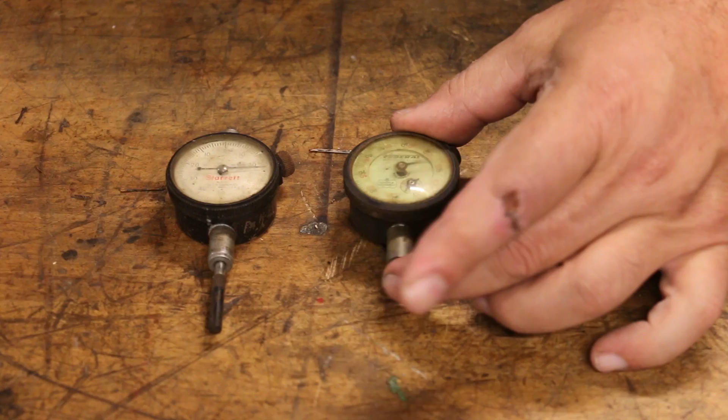I've got a couple of indicators here. All of them, I can't say they just... well, that one there may not really work. I think it's working, it's just really sticky. You know, all these are, they're, like I said, they're just sticky.

They're dirty, they're nasty. These were in a shop where I bought some machinery from one time, and they've been sitting out for no telling how long. I really think they just need a good cleaning, and there may be a few bad parts in them, but for the most part I don't think they're in terrible shape, but they're not usable as they are.

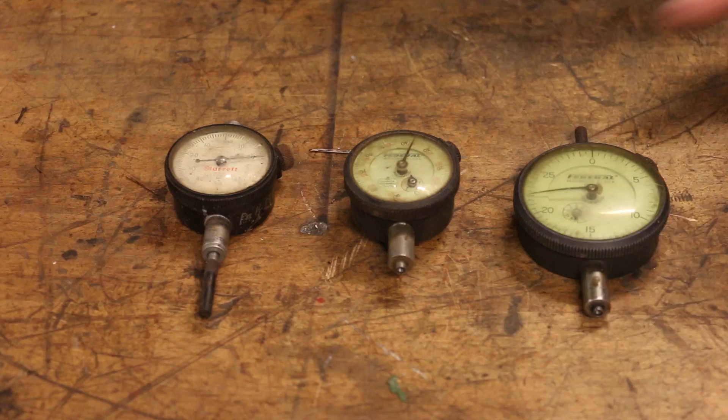So anyway, I contacted Mark, and I'm going to be sending these up to him. I wanted you guys to look at them before I sent them in.

This Federal here, it's not bad. This is a 1/1000th indicator. It's got a fairly short travel on it. It's missing the cover on the top to cover the shank. Another Federal here, this is a 1,000th indicator.

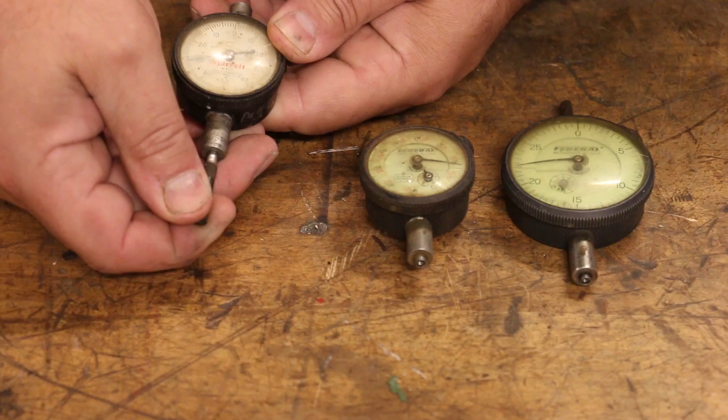Again, it's working but not great. The Starrett here, it may actually have some issues. It's working, but there's no spring return in there at all. And anyway, overall condition, not terrible, but not usable.

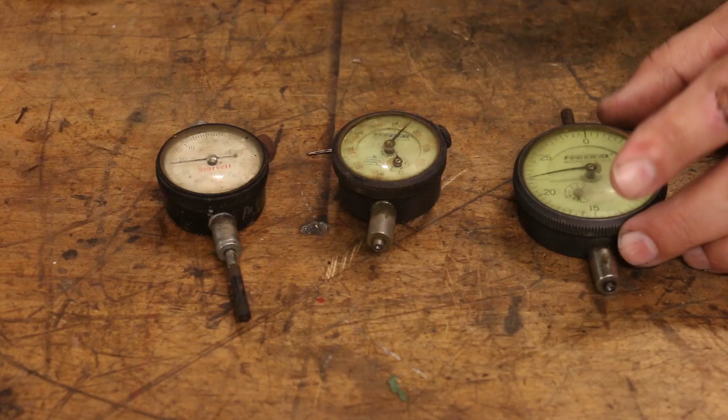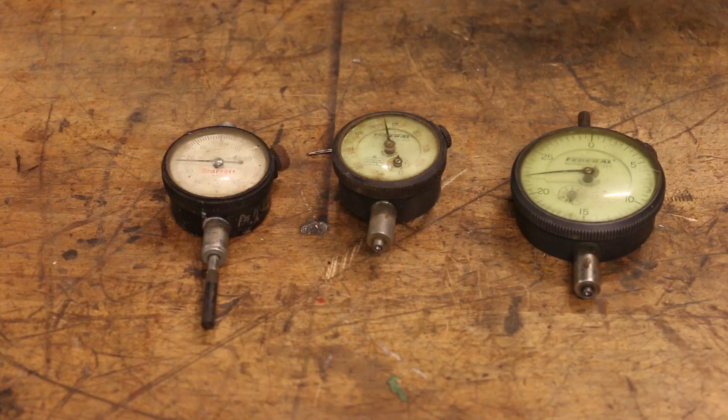So these are definitely candidates to be worked on and restored. Like I said, I wanted to let you guys take a look at them before I send them up. We'll send these up to Mark, and here in a week or two when I get them back, we'll feature them again and let you see what he did.

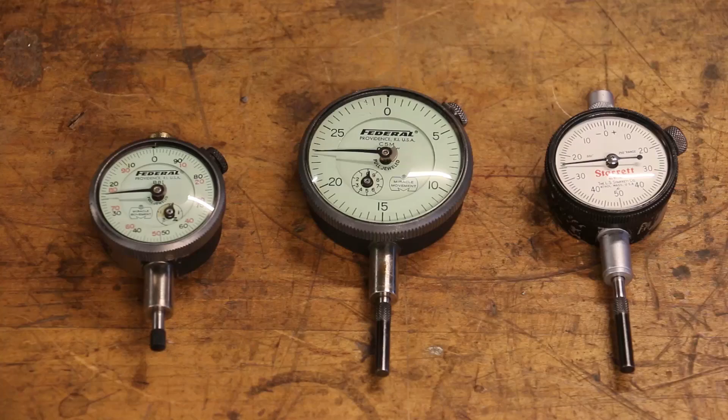So you saw what these looked like before I sent them up, and this is what came back to me in the mail. Mark had these, by the time I had time for him to get up there, probably about a week's turnaround, pretty quick. He sent me an email as soon as he got them, let me know he had them, gave me an estimate on repairing all of them, and the prices varied somewhat from one to the other. I think these ended up costing me, I almost hate to say because I don't remember exactly, $35 a piece, something like that in the ballpark.

And guys, let me just tell you, it depends on what needs to be done to it, so don't think that's a hard and fast rule. You can send them to him, Mark will give you an estimate on what it's going to cost to fix them, and then he'll fix them for you and send them back.

He tells me he has lots and lots of parts to fix all kinds of different brands. You can contact him first if you have any questions. Take a picture of whatever it is and send it to him, and he can probably give you an idea just over email. So anyway, I'm very impressed.

I was so impressed with the results that when these got back, I immediately boxed up 3 more indicators and sent them out to them, because I had a drawer with old indicators that were useless to me as they were, but I hated to throw them away because they just needed some work done. Mark's the man; he can get that done.

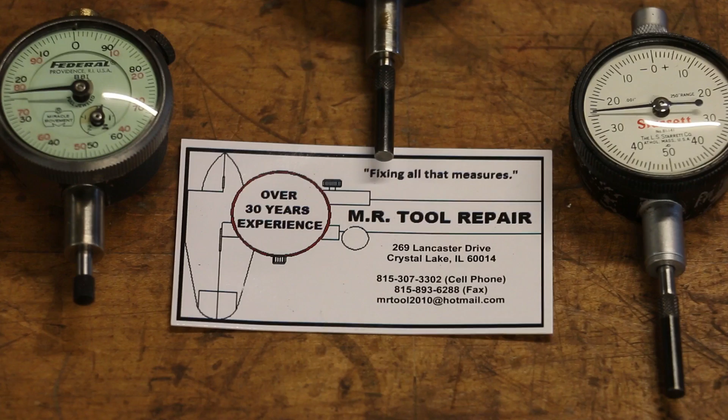So the next item here is a bunch of horizontal mill cutters that recently came in, and these came from the Bar Z Summer Bash we had about 5 or 6 weeks ago now, out in California. The story on this is that when we got out there, Tom Lipton, a fellow YouTube creator, go check out Tom's channel if you haven't already, had brought in a bunch of these horizontal mill cutters and had boxes of them there. He said, Keith, go over there, pick out some that you think you can use, take them home with you. He was basically just giving them to me.

Well, I was going to have to ship everything, and I was trying to figure out how to logistically do that, get everything packed up. I did ship a bunch of stuff back, and at the same time, James Green, yet another YouTube creator, go check out James's channel if you haven't already, was looking at them as well. He said, well, just pick out what you want and I'll take the rest back.

James and I got to talking. I said, I tell you what, James, just take them all home. James had driven out, I had flown out. I said, take them all home and just go through them and split them up however you want. Send me some, I'll be happy. Whatever I can get, I'm good with.

So James agreed, and in addition to taking them home, he went a step above and beyond. James actually took all these cutters, which when I saw them out in California looked kind of cruddy, rusty, just covered in gunk. Well, James took them back, soaked them all in Evaporust, cleaned them all up, and so far he's sent me 2 boxes of cutters in priority mail flat rate boxes, and I think I've probably still got a couple more boxes coming as he gets things cleaned up.

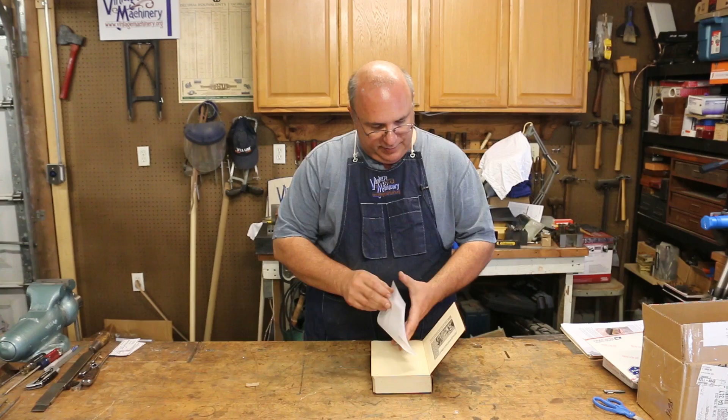Next item here is a really nice book. Came from James Massey, just came in the mail the other day. Let me zoom you in, I want to show you this, it's pretty cool. What James sent was Kent's Mechanical Engineer's Handbook.

This one is specifically on power and all kinds of power related items. Let's see, this particular one is copyrighted - the original was 1895, and the latest copyright date on here is 1915. It's got 1143 down here in the bottom, so I'm guessing this was probably actually printed about 1943. But this is basically all about all kinds of engines. This is the 11th edition, from July 1936, so probably that 43 printing date.

It's got all kinds of stuff in here about all types of power transmission or power related stuff. Let me see if I can find a decent index. Section 1 is on air, section 2 is on water, 3 is heat - boilers and so forth. Section 4 is combustion and fuels, steam, the steam boiler, the steam engine, the steam turbine, condensing and cooling equipment, refrigeration and ice making, heating, ventilation, air conditioning, internal combustion engines, gas producers, transportation, electrical power, power test codes, and mathematical tables.

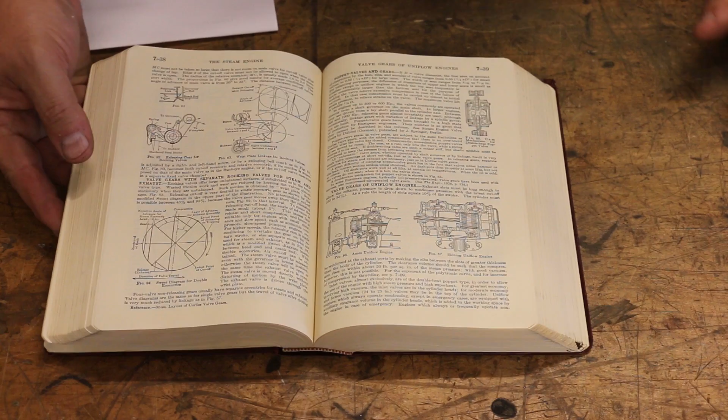So again, some pretty cool stuff in here. Of particular interest to me is some of the stuff related to steam engines - just more technical information. When you go to start working on these old steam engines, having reference books like this is really, really nice, but there's a lot more in here. Steam turbines, and up here in the front I noticed there was some water powered stuff, which is kind of cool. So anyway, pretty cool book.

I want to thank James for sending that on to me. This will be a nice addition to the library. I'm old-fashioned, I like old-fashioned books. The internet's great to look things up, but sometimes I just want to go pull a book off the shelf and look stuff up. A lot of the information in these old books, quite honestly, you can't find a lot of it on the internet anymore. So James, thanks a lot, appreciate it very much.

Next comes another little book item here. This is a really nice original copy of a manual from LeBlond. Of course, I'm restoring a LeBlond lathe right now - I'm running a Regal, and a Regal was a line of lathes that they sold. This is the 15th edition, copyrighted in 1951. Price was originally $1. This one was bought out of the University of Minnesota bookstore - we put a note on here. Notice the price tag, somebody paid 65 cents for this book.

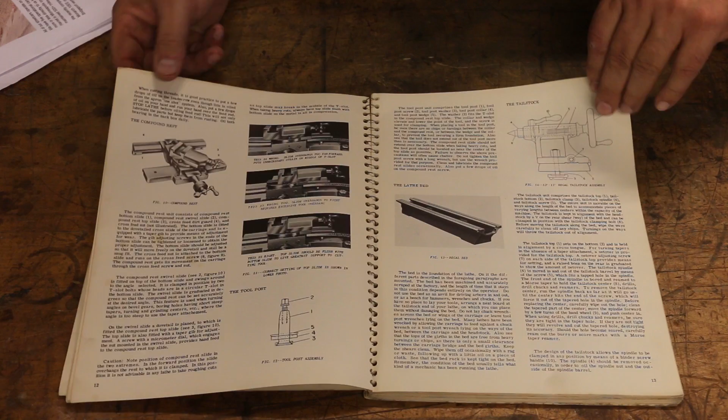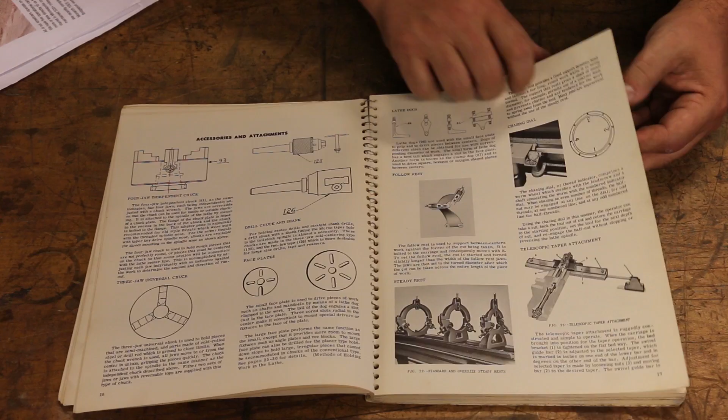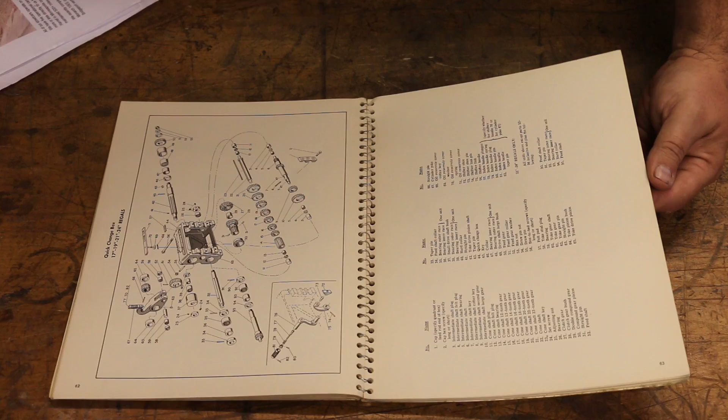So probably about 1951. Lots of information in here, really all about lathes in general. I'm going to get this scanned and put up on the website, VintageMachinery.org, with a lot of the other manuals and stuff. If we don't already have it, it may already be up there. If it isn't, I will get this scanned and put up there. But a lot of real good information. So I'm excited to have this. This will be a nice addition to my LeBlond lathe, and it'll be a nice bit of information for someone else that may have one. It even has parts diagrams back here in the back.

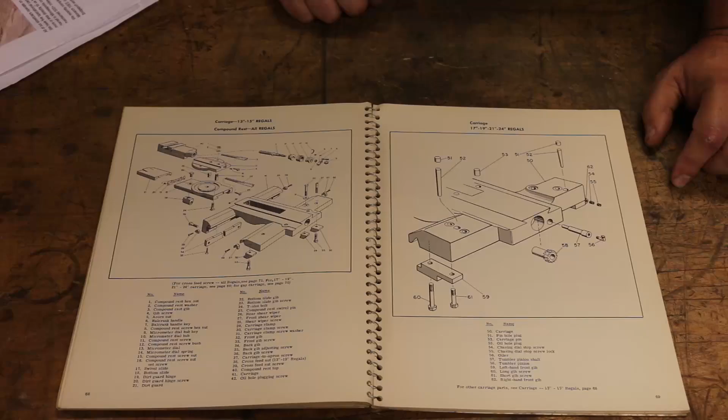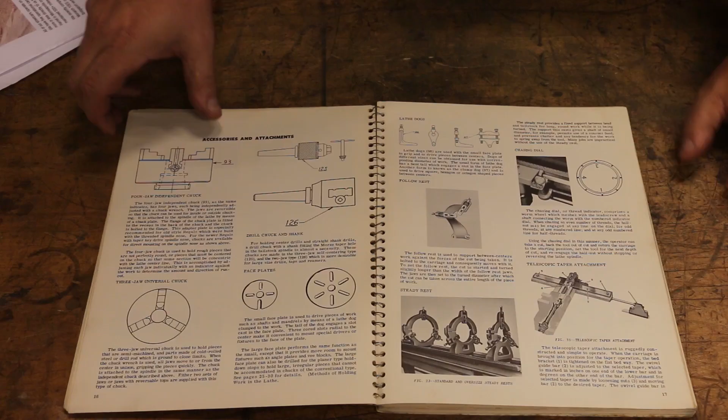And again, this is for the Regal line. Now my lathe is actually what they call their heavy duty lathe, and it is very similar to the Regals, but there are some subtle differences. So the parts diagrams won't apply to my lathe, but really most of the information in here will be very helpful to my particular lathe. But anyway, very nice thing.

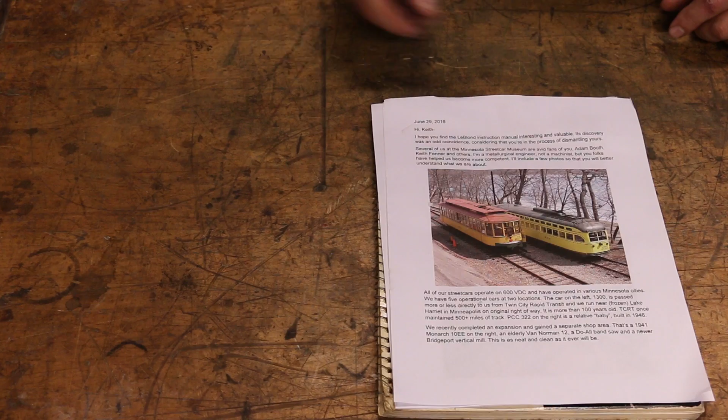Dennis sent me some information. He is a volunteer at the Minnesota Streetcar Museum, and they do a lot of restoration work up there. He sent me a nice little letter here, some pictures of their shop, working on some stuff, and so on. So anyway, pretty interesting place. I'd love to get up there and visit them sometime.

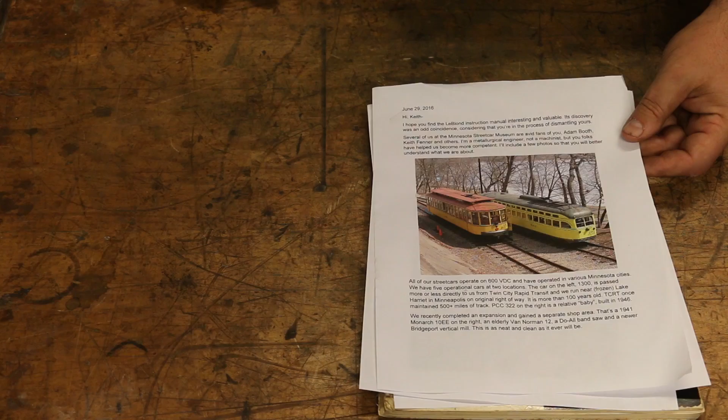Thanks a lot. Seems like we've got a bunch of paper items in this edition, which is great because I love the old books and manuals and even sales literature and so forth from these different companies.

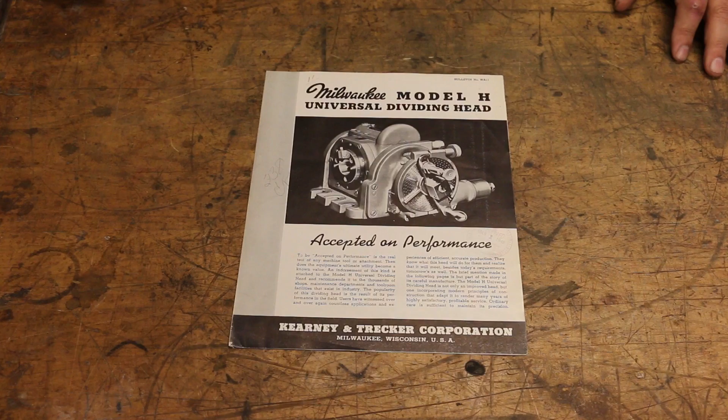And this one comes from Chris Anderson. Chris is someone out in California, but we've been communicating now for a while. In fact, I believe Chris actually purchased my old Brown and Sharpe type dividing head when I got my K&T dividing head. And ironically, he found an original sales bulletin here on the Model H universal dividing head, which is the dividing head that I have now to go with my K&T Model H milling machine.

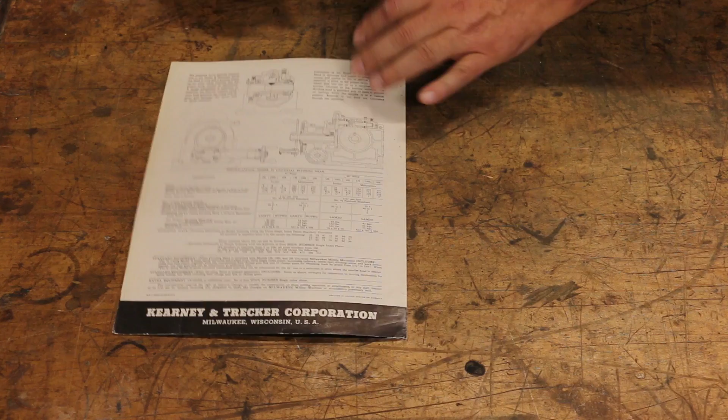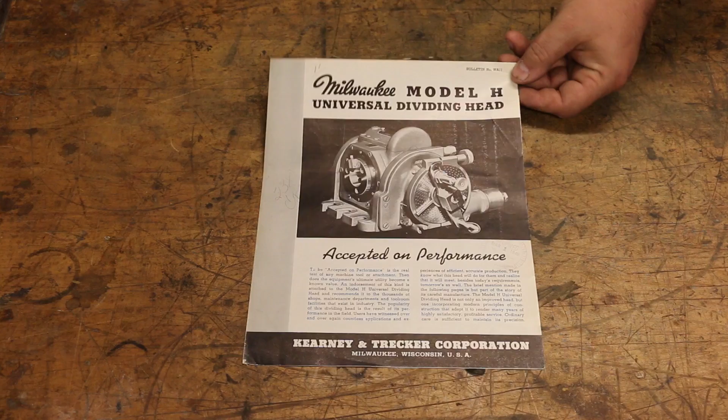So again, this is a sales piece primarily, but it has a lot of the technical information about it and so forth. I'm not sure, we have quite a bit of K&T literature scanned up on my VintageMachinery.org website. Not sure if this particular one is in there or not. If it isn't, as soon as I get a chance, I will scan this and upload it, so it will be available to anybody that wants to take a look at it.

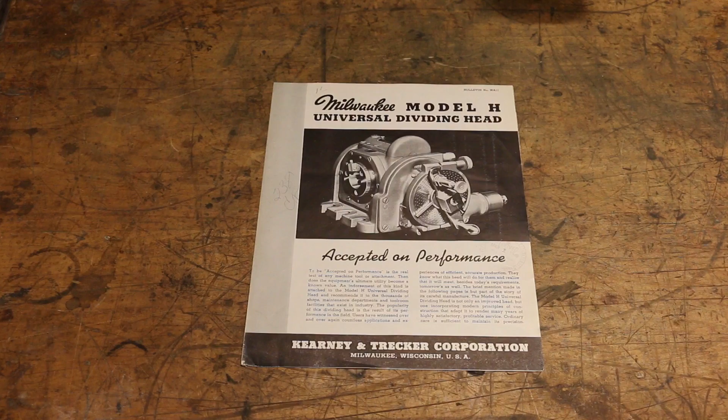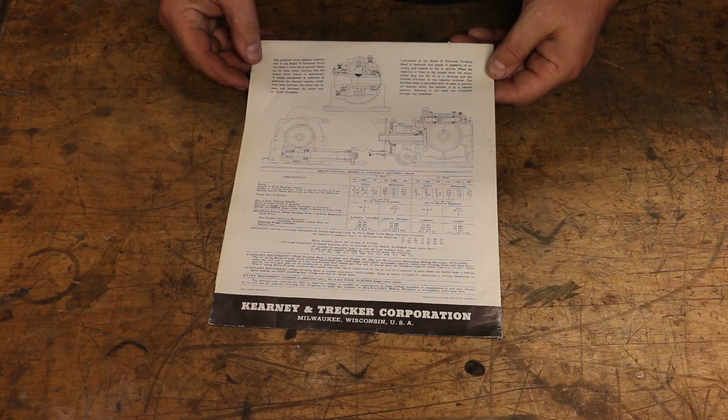It's got a received stamp on here, March 1st, 1949, was when this was received. And the printer's code down here said it was made in 1948 when it was printed, so that'll be the vintage on this.

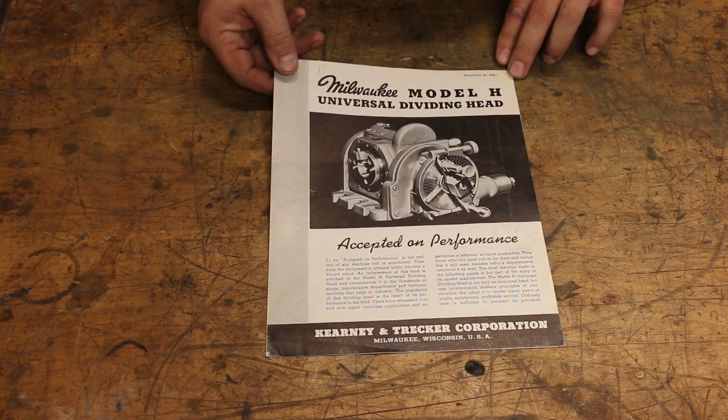So next here, got a box. This came from Wayne Davis out in Ingram, Texas, and it's a box full of miscellaneous square head nuts, bolts, etc. Wayne had sent me an email a while back asking if we'd be interested in these, and I said, yeah, send them along.

Basically, this will go out to the museum. And you know, when we're working on restoring stuff out there, to me, when I look at some old piece of equipment or machinery, very often pre-1900, and I see a nice shiny zinc-plated hex nut on there, I just want to cringe because it's just not right. Sometimes when doing these restorations, for a museum, it's the little details that just make the difference. Square head nuts and bolts are one of those things that can make a difference, in my opinion, in a restoration.

And these were just a bunch of miscellaneous stuff he had laying around. In fact, he sent me a note, I thought it was kind of funny. He said, my dad called square nuts farm nuts, and whenever he was working on something that had them, he would throw them away and replace them with hex nuts. Here are a few that escaped that fate. So anyway, thanks a lot. We've actually got a bolt bin out at the museum where we sort all this stuff out, recycle it, reuse it, both nuts and bolts.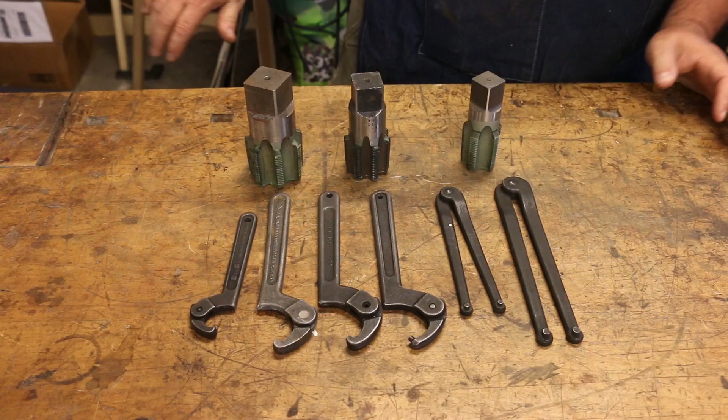So the next box here of stuff comes from Walter Odell, who is up in Saginaw, Michigan. Walter wanted to send me a couple of things, and I was pretty excited when I opened up the box and found these, particularly these spanner wrenches. That's something I've been needing.

Also sent me a couple of taps. These are all pipe taps - a 2-inch, 1.5 inches, and a 1.25 inch pipe tap. These will also get used probably out at the museum. We do a lot of pipe work out there, particularly with boilers and steam stuff, so these larger size pipe taps will definitely come in handy. I'll probably just take these out there to the museum and put them in their collection. If I ever need one, I'll know where one's at I can go grab. I personally don't do a lot of pipe work - occasionally I have a need for it, but the museum is always using these things, so we'll probably put them out there. Walter, thanks a lot again. Some very handy stuff here, and we will put it all to use.